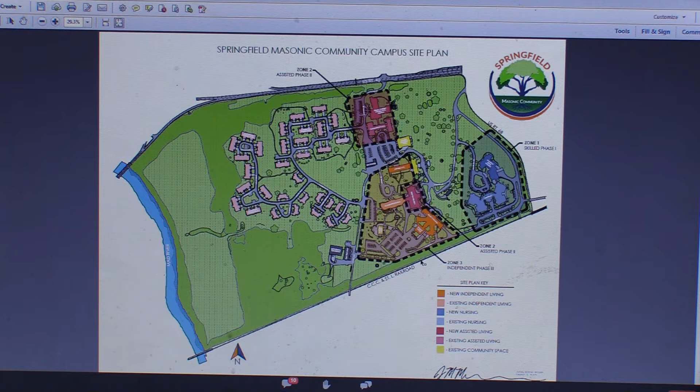So those are the three zones. There is other work that we are looking at. In addition to these three strategic zones, we are also going to be looking at other assets on campus that potentially need updating or maybe even need to be taken out of service. The master plan also looks at removing some poorly positioned buildings, and some buildings that are at the point where if we had to renovate them to bring them up to today's standards, it would be less expensive to just demolish them and potentially rebuild them.

Other things we are looking at are mechanical systems that have reached or are reaching their useful life. There are more economical ways to create heat and air conditioning that would be more beneficial to the campus.

Currently, this building right here is our powerhouse. This is where we generate steam, and we force it through tunnels that come all the way down here and go all the way over to Cunningham. So we have very long tunnels underground with steam pipes that carry steam from the powerhouse all the way out.

That is what gives us both domestic hot water and heat in the majority of these buildings along the way. About two years ago we started a project and managed to take Cunningham and Iredell off of the steam tunnel. So now the tunnel is still there, but the steam stops here at Bancroft. We've been able to independently heat and cool Cunningham and Iredell. That's a plan we'll continue to move forward with, looking to move all the mechanical systems to standalone independent heating and cooling systems at each building.

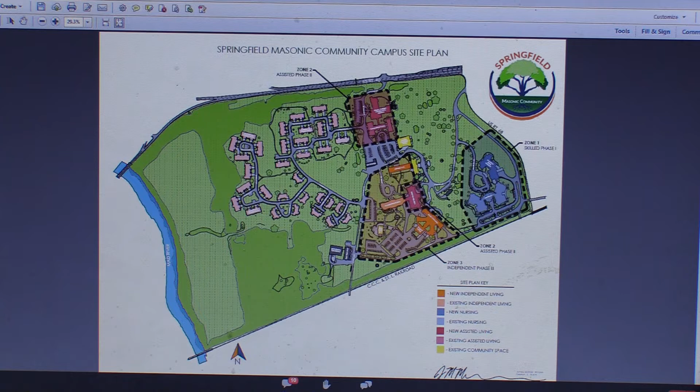We are going to be starting with renovations on one half of the building, then moving to renovations on the other half while we build the new addition.

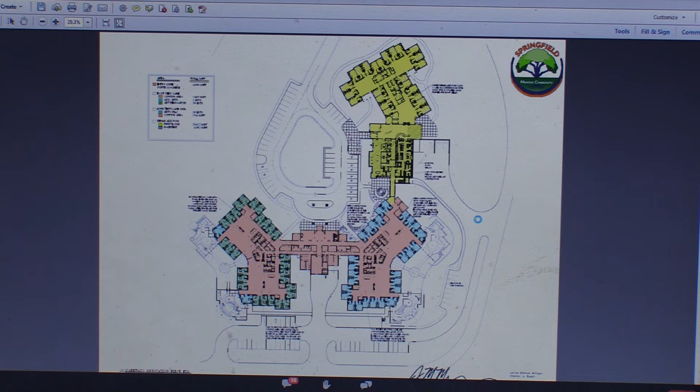Some things you need to know about the new addition: if I scroll back up to the previous screen, Wrigley Commons has a building to the back of it called Burdick Tower. In Burdick Tower is the kitchen that feeds the skilled nursing facilities as well as the assisted living facilities. Basically, its sole purpose is to house that kitchen.

We are going to be moving the kitchen down inside this new addition. The new addition will have a state-of-the-art kitchen that will feed all of skilled nursing and still feed the remote dining rooms over at Iredell, Cunningham, and York Rite.

I'm not sure what's happening right now. My mouse is just continuously spinning and I'm kind of frozen. Are you guys seeing that? Please hold for one minute.

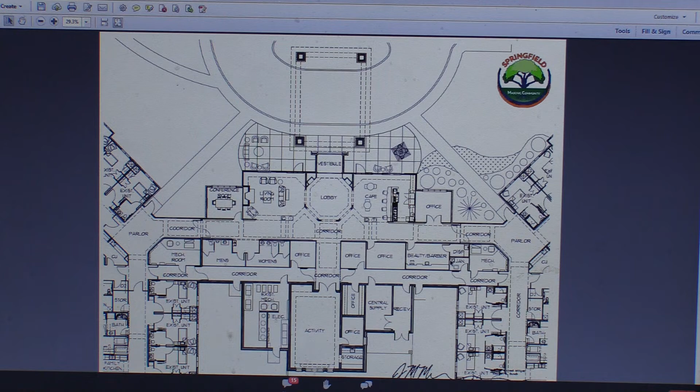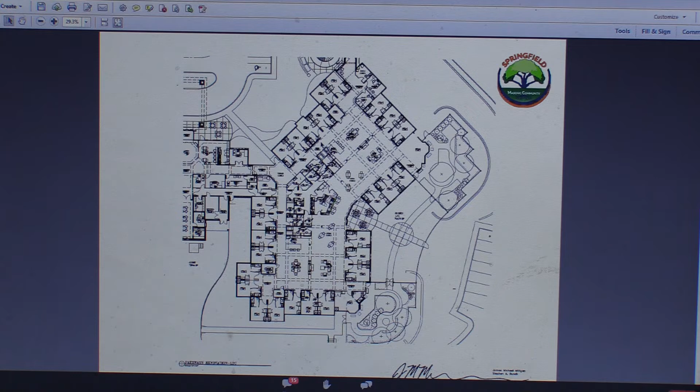This is the right side of the building. So over here, you will see the offices and that's the office and the ice cream parlor. On this side of the building, this will become our long-term care wing. We're going to be renovating everything over here.

Currently, these are separated by a whole bunch of inner workings right in this area. There's shower rooms, med rooms, a maze of hallways back here, kitchenettes. Those are all coming out. We're going to renovate this space, opening one half of the building completely so that the residents can travel all around this pod.

This is going to be a servery/kitchen right here in the middle that we can cook the food fresh for all the residents and serve it out to the dining spaces that are here. This is a glass wall that goes out to a new patio with outdoor seating.

We do have to make some adjustments in the rooms in order to make this connection that goes up to the rehab facility. We are going to be renovating some rooms over here and putting in a doctor's office with exam rooms to make it a lot easier to be seen by not only the primary care physicians, but also any ancillary physicians that will be coming in, podiatry, audiology, things like that.

New shower rooms, a new spa room, and each section has a family-style kitchen right here and right here, where families can come in and make snacks. We can do activities with residents participating and helping make different snacks that we can all share. And we're also going to be creating new rooms here where the sitting areas are by the fireplaces.

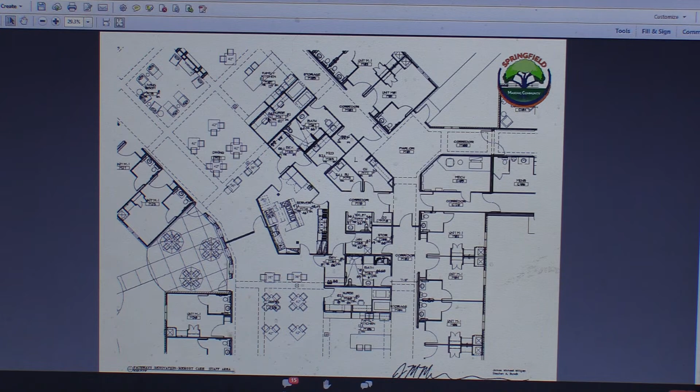The new addition coming out front, this is going to be a 24-bed dedicated short-term rehabilitation unit. I'm going to try to scroll down one.

Yeah. I'll try to zoom, bear with me. I think everything's going to kind of slow down on me here.

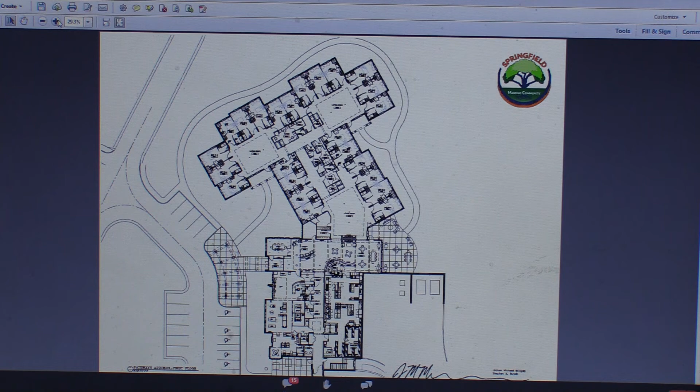There we go. So there'll be a new covered porte-cochere here. When you come into the new rehab unit, there's going to be a reception desk. This whole section right here is the therapy gym.

There will be a new therapy gym, new equipment, complete with private therapy cabanas, in which when we take somebody in for a mat table treatment, this is able to be closed off and there'll be separate rooms.

They have storage. We have a mocked kitchen, mocked bathroom, and mocked bedroom. We also have... This whole area here is going to be developed as an outdoor therapy gym.

You can see the new kitchen right here with dry storage and cooler and freezer space, and then all the kitchen equipment here that is needed. And this is an elevator.

And you're wondering, why is there an elevator when Pathways is a one-story building? Well, this is going to have a basement. Pathways is actually built into the side of a hill, and out in this space, there's a significant decrease in elevation of the land.

We are going to rework the site, and there's actually going to be a basement under this section of the building.

This is going to be our central supply, some dry storage for dietary, the employee break room and lounge, as well as the delivery area for the tractor trailers to come in and deliver goods.

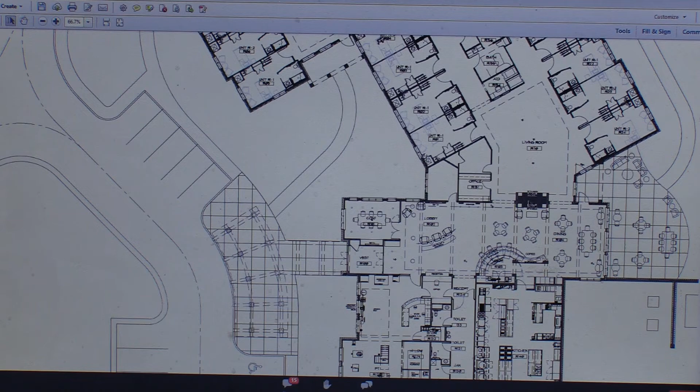There's a small seating area here in the lobby beside a conference room, and then there's some office space here. This is a double-sided fireplace that's going to help separate this large room here from the resident areas, which start moving this way.

So what we have are 3 sections of 8 rooms, which gives us our 24. So you have a section here with some central functions of clean and soiled utilities, some bathrooms, as well as a laundry room here.

All of these rooms, again, are going to be private rooms, private baths with showers.

Nurses' station centrally located right here, as well as aid stations here and here, which allow us oversight of these 2 units where the rooms surround these living rooms.

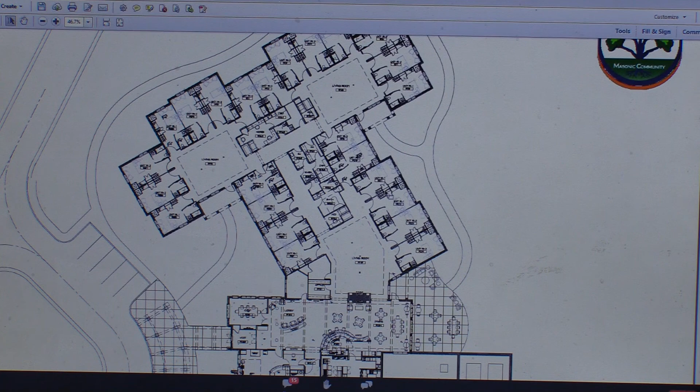A question was asked: how many rooms are in the memory care in each pod? Those will remain 15 rooms per pod.

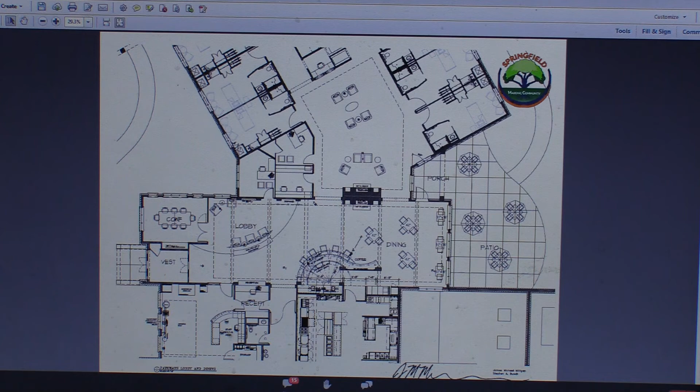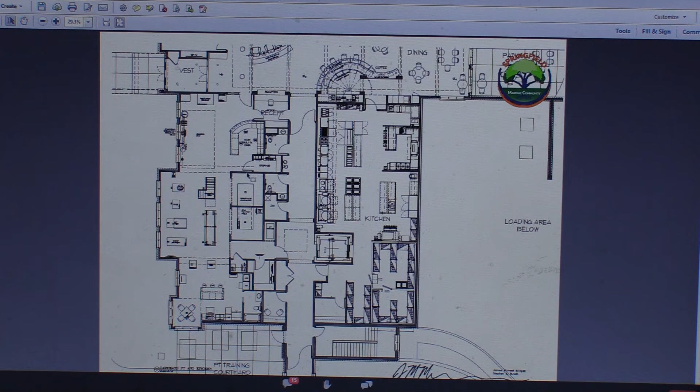This is the basement. Like I said— sorry, this is not the basement. This is the therapy gym. This is the kitchen, which we looked at earlier.

This is kind of a blow-up of the T, where that new addition T's. You can see the soiled utility, a washroom, the dryer, clean utility, janitor's side here, and then there is a spa right here in the middle, and an aid station here.

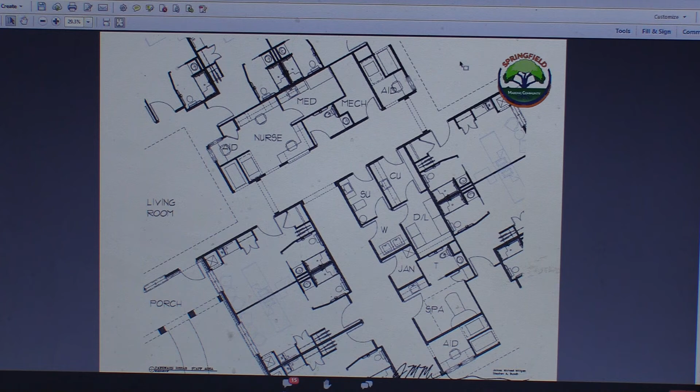The nurse's station has sight down the hall, and also through the aid station here to this side, as well as the aid station this way, and then a public restroom here in the middle.

Now this is the basement. Sorry for that, I'm going to zoom in just a shade. It's not letting me move over. There we go. So this driveway will go out and connect to the loop road.

This is where delivery trucks can come in and drop off here at the loading dock. We have a receiving area. This is the elevator that comes up into the kitchen, janitor closet, a couple of offices, central supply, and more dry storage.

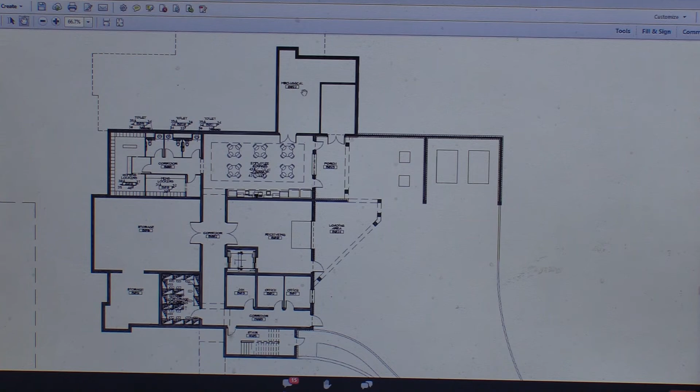This is all of our locker rooms for the staff. We're going to have a new employee break room and lounge, which does have doors that go out to a porch. And then the mechanical room right here will house all the new HVAC equipment that we need to have inside the building.

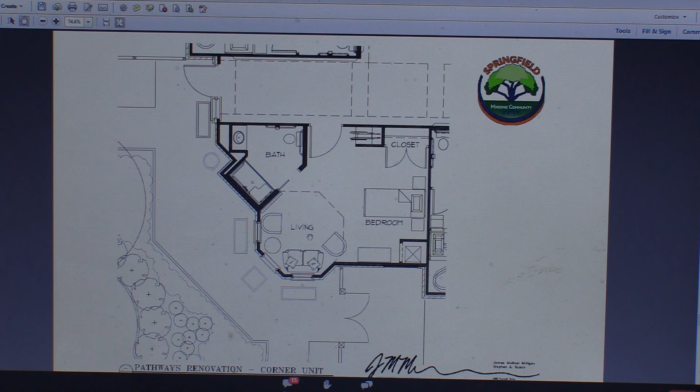This is a renovated unit in the long-term care side. Again, the HVAC, the built-ins, closets, the bed and chair. The bathroom gets reworked over here where the wheelchair will store just as you walk inside the door. The memory keepsake doors right outside the door are being kept. We will be adding a walk-in shower here, again with a sink and a toilet. And then these are the existing units currently on the memory care side.

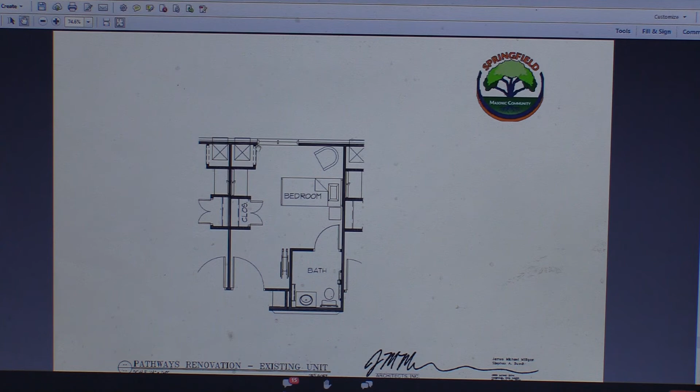Again, the VTAC units will be installed. We'll be putting in built-in closets and built-in dressers. The bed will go against the wall. The bathroom is not getting the shower installed, but they are getting renovated and updated fixtures.

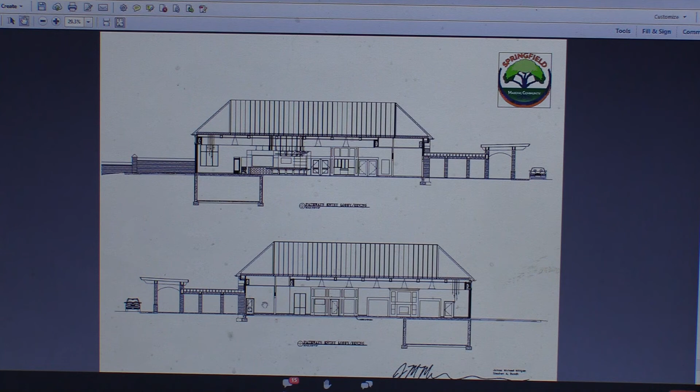So this is just some elevations of what the facility will look like from the outside. These are basic massing drawings, which show you what things look like at certain levels. They're kind of hard to read and understand, but I have some other pictures here I want to show.

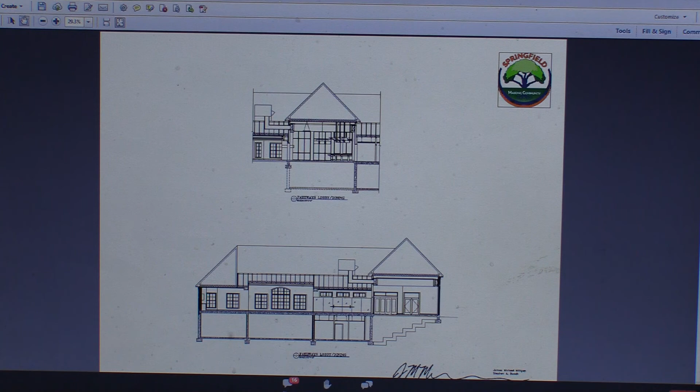I just hope this works. Last time I did this, it did not. So let's see. Did the screen change? No, okay, let me try something different. How about now?

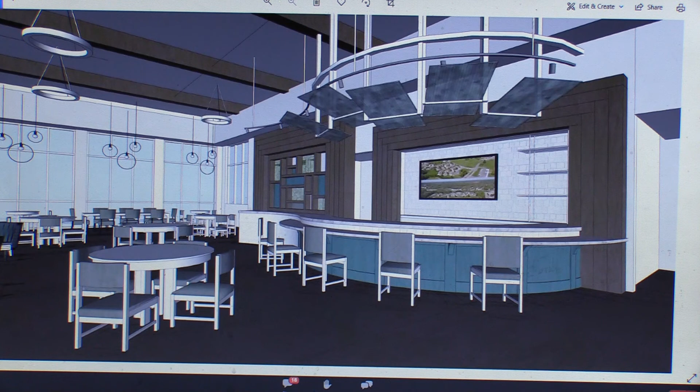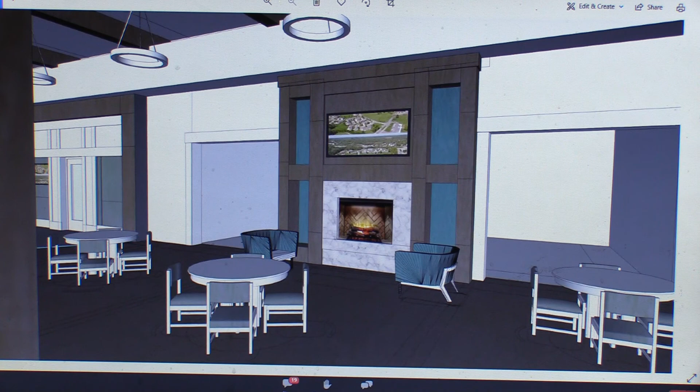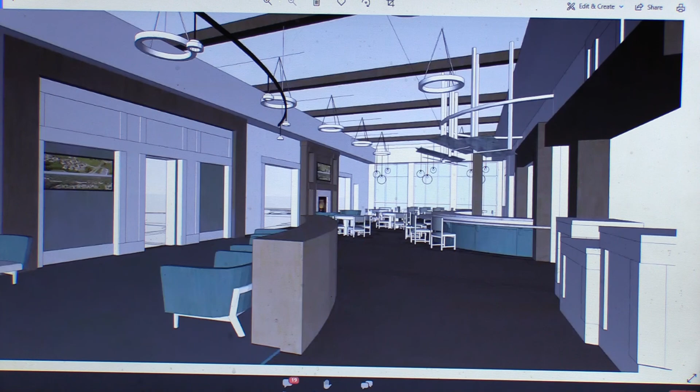Okay, so that is what I have to present and what I have to show everybody. Like I said, we're pretty far along in the design development phase, far enough along that we're very excited to take the opportunity to make the announcement and show everybody what we're planning and what the future holds.

Here at SMC, again, the first phase of this plan is to start with skilled nursing and then move to the other stages. We have to start somewhere. We have to pick the spots that are going to give us the biggest bang and the biggest head start on how we can start to reposition the rest of the campus as we move forward.

So the skilled nursing unit became the first choice. Assisted living is not going to be very far behind that. We are already designing the new building. I don't have that design far enough along to share, but I can tell you it is going to be just as impressive as this renovation in skilled nursing.